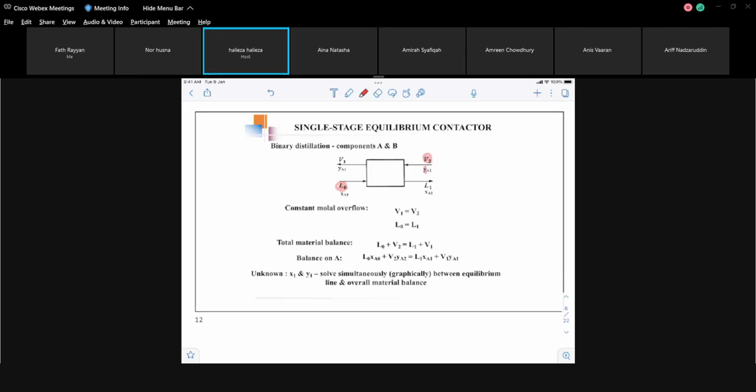So if you look at this diagram, you have vapor coming in at V2, that's the flow rate, and liquid is coming in having a flow rate of L subscript 0. The composition, as always, when it is vapor, you denote the mole fraction by Y, and when you have liquid, the mole fraction is X. Over here, we have the subscript A, because you have component A, the lower boiling point component, and another component B, the higher boiling point component.

So we'll be concentrating mainly on component A, the one with the lower boiling point. So the subscript for your mole fraction will mainly be for component A. This is your first stage, so any flow rate, any stream coming out from that stage will have subscript 1. For example, V1, L1.

So the mole fractions for the vapor and the liquid will follow suit. You will also have 1 as the subscript for your mole fraction.

There's a new term you need to assume: constant molar overflow. Constant molar means the flow rate of the vapor will be the same, it doesn't change, it's constant. Same goes for the liquid, the flow rate of the liquid will be the same. That is the assumption you make.

We'll be looking at a single stage in this case, and you only have two components. You do the material balance as always: input equals output. There's no reaction here, just separation. Your input is coming in here, that's the liquid, and that's the gas. So that's the input, and the output is coming out here, that's the liquid coming out, and that's the gas coming out. So input equals output, and when you do the material balance on component A only, you will be putting in the mole fraction.

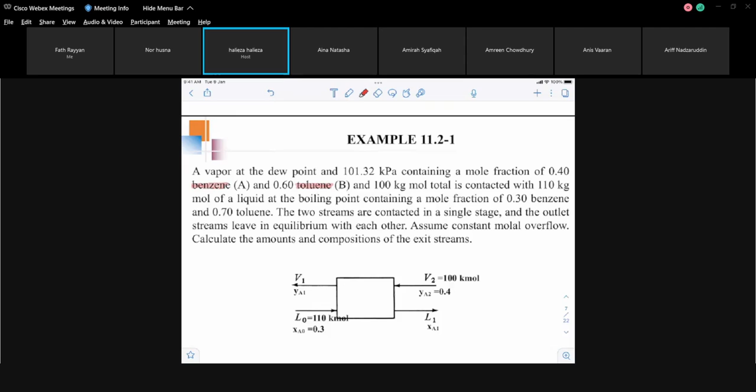So over here we have a mixture of benzene, which is the light component with the lower boiling point, and toluene, which is the component with the higher boiling point. You have a mixture that contains 0.4 mole fraction of benzene coming in. That is the vapor coming in. So your vapor coming in has that mole fraction, that is for benzene.

And the flow rate of that vapor is 100 kilogram mole. I would like to point out that when you're dealing with absorption or distillation, so far the flow rates are in molar flow rate. The unit is in kilomole, mole, or pound mole, so do take note of that. So your vapor coming in has a flow rate of 100 kilomole per hour. This is the pressure of your system.

That vapor will be contacted with 110 kilogram mole of a liquid at its boiling point. So the liquid coming in is 110 kilomole per hour. Another thing I would like to point out is that your vapor is at its dew point and your liquid is at its bubble point or boiling point. So this two streams, for the vapor it is at the dew point, and for the liquid it is at the boiling point. That's what actually happens in the column, in your distillation column.

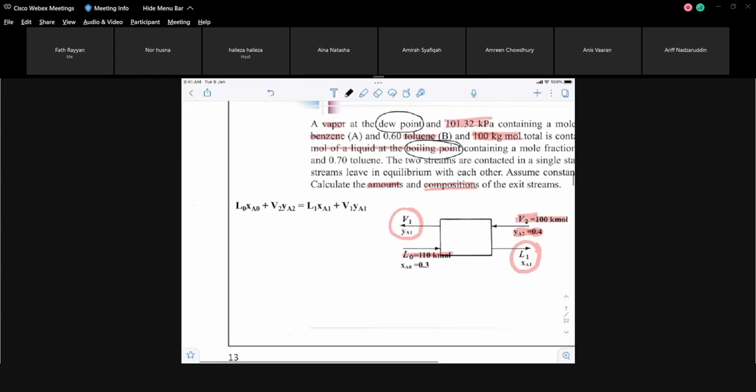We do know the mole fraction of the input stream coming in, we do know that. And also we do know the flow rate of the inlet stream. So let's substitute in the values that we have.

I'm not going to write the subscript A because it is understood that we are referring to component A, which in this case is benzene. So that's your equation, and as you can see, you have 4 unknowns based on that equation.

But there's another statement in the question that states you will assume constant molar overflow. And with that assumption, you will assume that L1 is equal to L subscript 0, and V1 is equal to V2. So that means this flow rate is going to be the same as that flow rate, and that flow rate is going to be the same as that flow rate.

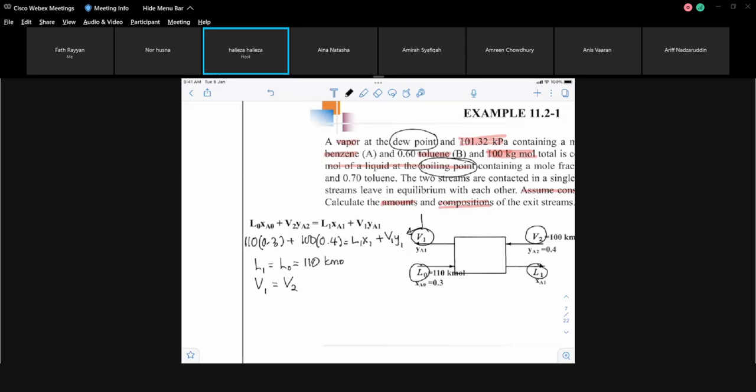So for your liquid flow rate, it is 110 kilomole, not per hour, just kilomole. And your vapor flow rate is 100 kilomole. Now, when you rewrite this material balance, you are left with only two unknowns.

Need the bracket. Two unknowns, one equation, not enough information for you to solve it. So you need extra information. That extra information is in the form of our graph. Let me try to get the graph.

We need the benzene toluene graph. Let me try to copy it. There you go, try to fit everything in here. This is our graph for benzene and toluene.

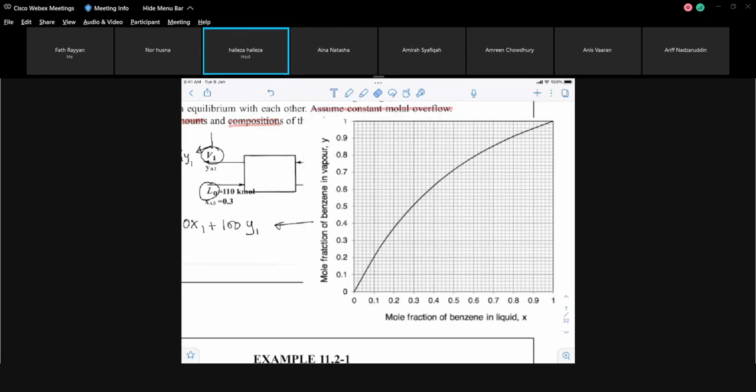I need to erase this. So what we need to do, or you need to do, I'm assuming that for the second test too you need to plot your own graph by hand, unless they decide the graph will be ready plotted. If it's ready plotted, we'll give it a few days, maybe one day before, for you to print it. I hope that can be done, but I can't guarantee it. So just know how to plot your graph.

The graph is plotted whereby the x-axis is the mole fraction of component A in the liquid, and the y-axis is the mole fraction of component A in the vapor. So this is your equilibrium curve, or your equilibrium line, and you can get it from the appendix.

In our case, I already showed you guys how it can be obtained based on Raoult's law, but in fact you don't really need Raoult's law, because in table 11.1 you have your x there and your y there. So you can just plot it based on these values, and you will come up with your graph, which for an ideal solution gives a perfect curve.

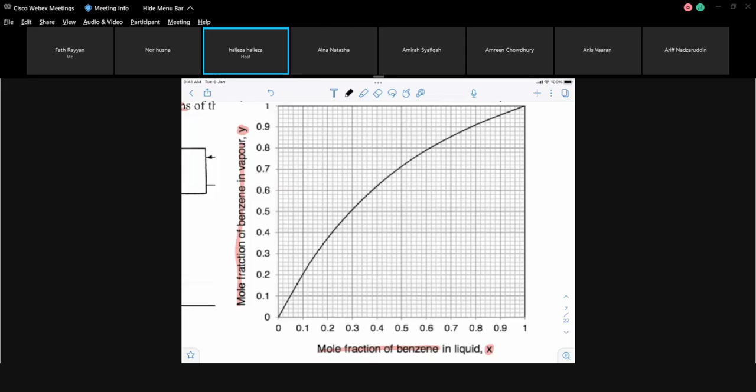In this case, what you have to do next is draw your 45-degree line. I did mention that your 45-degree line is for you to compare how easy it is to separate your components. Trying to get a straight line... there we go. Okay, that is our 45-degree line.

Now let's look at the equation. You have the composition, and you need to calculate the amount. We already did that, we already have L, you already have L1, you already have V1. So now, in order to get your X1 and Y1, it has to be done by trial and error.

You look at your graph over here. Let me get my graph. Okay, by trial and error, try to get points, maybe 3 or 4, or at least 2. I think we need at least 3 points using this equation.

Let's say x1 equals 0.2. Then from there, you try to get your y1. So let's put in the values. I'm going to just multiply the values that I have, that will be easier. That is 33 plus 40 equals 110 times 0.2, because I substitute x1 equals 0.2 inside the equation. So now I have 100 y1. From there I should be able to get my y1. So 110 times 0.2, that's 22.

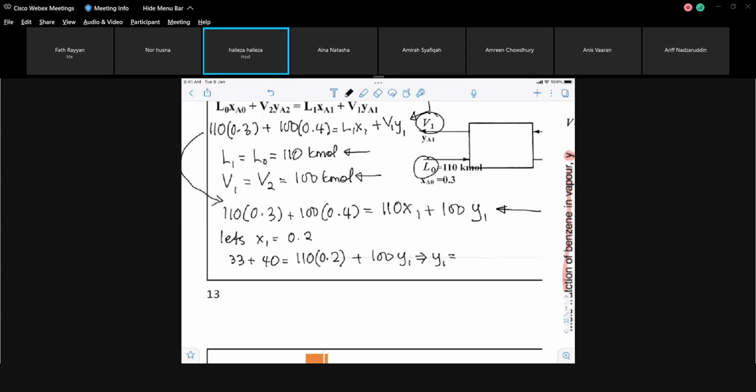So let's calculate what our y1 is. Y1 is equal to 0.51. So I will locate that point on the graph: when my x is 0.2, my y1 is 0.51. So 0.2 is there, 0.51 is here, this is somewhere here. So that's one point, but it's not on the equilibrium curve, so that's not the point we want.

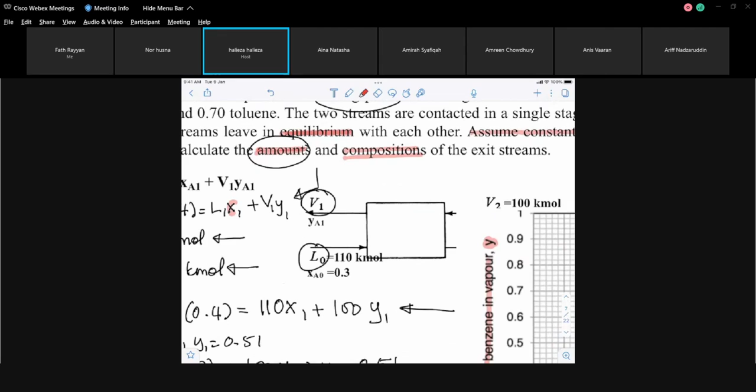The value of x1 and y1 should be in equilibrium, because we said the system comes to equilibrium. So your x1 and y1 should be in equilibrium, the composition should be on the equilibrium curve. But our first point is not on the equilibrium curve, so we need to get a few more points in order to get a straight line. Then where that straight line intersects the equilibrium curve is your value of x1 and y1.

So 33 cancels off, so obviously y1 is 0.4. Just by looking at the equation, you cancel off the 33 on the left hand side and the 33 on the right hand side. So you have 40 on the left hand side and 100 y1. So y1 is equal to 0.4.

Let's put that value here. So our x is 0.3, our y is 0.4. That's 0.3 and 0.4 there. Again, it's not on the equilibrium line. To me, this is good enough - 2 points is good enough for you to proceed to draw your straight line, because a straight line just needs 2 points.

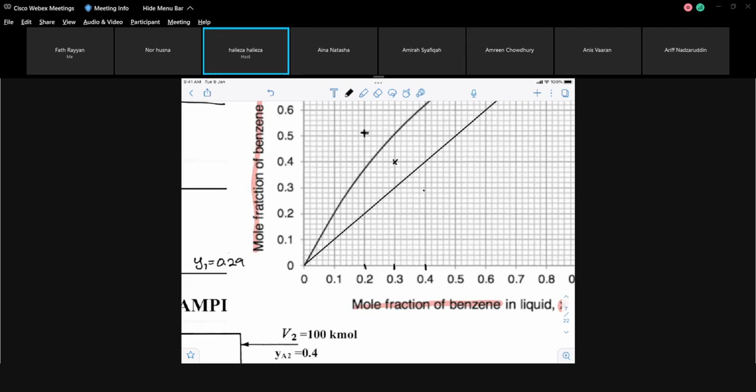So you will join these 2 points, connect them up using a straight line. Let's do it using red color. Let's draw a red color line. Guys, I have my straight line.

That is my value for x1 from the x-axis, and the corresponding value for my y will be from the y-axis. So if we look at the value for x1...

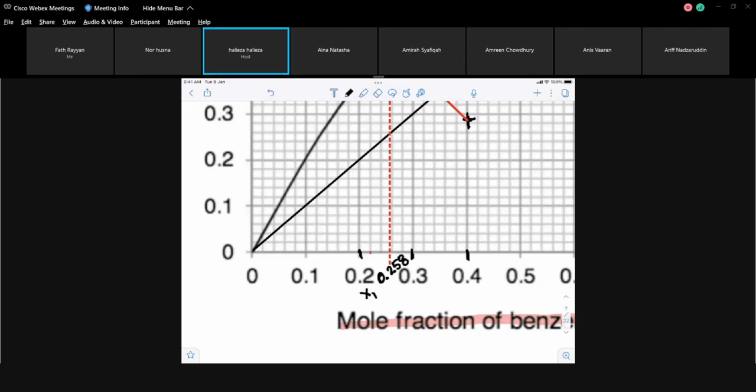That's 2, 4, almost 6, so almost 0.26. About the composition of x1 is about 0.2, so not 6, 2, 4, 6, yeah 6. So about 0.258 maybe, roughly estimate, it's just a rough estimate. And the y value, if you look at it, that's 2, that's 4, that's about 4, 5. That is your y1, and your x1 is 0.258.

But the solution from the textbook, let's have a look at the solution from the textbook. Okay, the textbook y1 is equal to 0.455, and the x1 is 0.25. So it's not exactly the same, because it's how we draw our lines, how we read off the values that contribute to the difference.

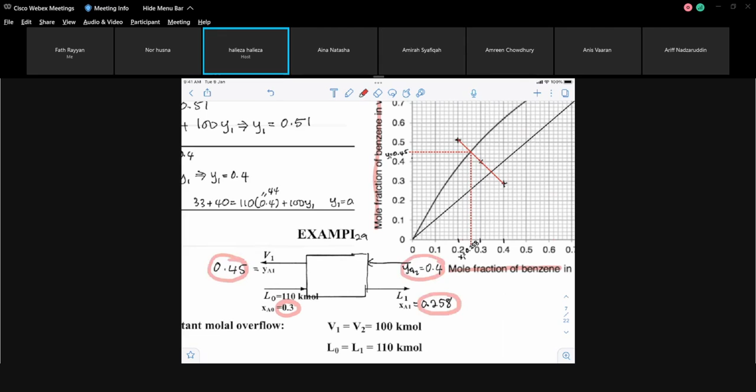Y2, what is that composition? It's 0.4. So now you can compare that there's not much change in the composition there. Same thing for the gas, for the liquid, 0.3 going to 0.258. It's only a slight, very small change. So a single stage is not good enough for the industry - you need, in order to achieve bigger changes, more than one stage. Okay, any questions?

Doctor: For the graph, is it certainly a straight line if you do the trial and error and connect all the points? Yes, because it's based on the material balance, you will get a straight line. Thank you, Doctor. You're welcome.

Any other questions? Normally, when you plot the graph, you will get the maximum mole fraction is always 1. So that you can draw your 45-degree line - just connect the 0 to the upper point, which is 1. So you will know that your 45-degree line is connecting from the origin to the upper corner of your graph. And normally you will plot it until 1.

So no questions? Okay, we have a few more simple distillation. They are mainly single stage. The other one here is equilibrium or flash distillation. Again, the product will be in equilibrium.

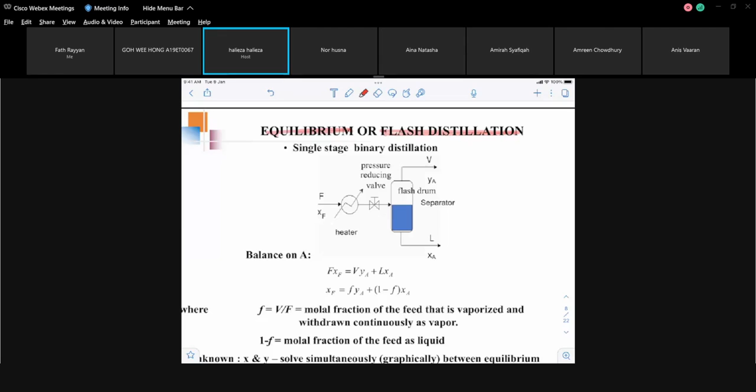And if you look at the diagram here, you have your feed coming in, having that composition, preheated in a heat exchanger. When it is preheated, that means your feed becomes hotter. After that, it passes through a pressure reducing valve, meaning your feed pressure will be reduced. The pressure will be reduced from the initial pressure.

There will be a drop in pressure. So initially it is at high pressure, now there's a drop in pressure. And when the drop in pressure occurs, your feed, which is initially in a liquid phase, will vaporize due to the sudden drop in pressure. But in doing the vaporization, the sudden vaporization will cause a drop in temperature. And when there's a drop in temperature, the higher boiling point component will condense. Because remember, you have two components - we're talking about two components, A and B.

Your component A is the lower boiling point, and B will be the higher boiling point. So when there's a drop in temperature, component B will start to condense.

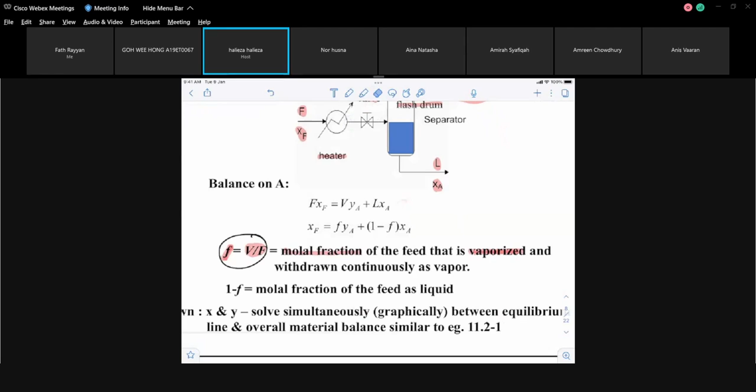Based on the second equation, you should be able to use it to solve for the unknown composition, which is the outlet composition. Again, you need to use your graph - you cannot solve it just based on one equation, because you have two unknowns, the y and the x. So you have to solve it graphically, just like what we did in this example. Same thing as how we did it in this example, but in this case you will be using this equation.

Let's look at, maybe just to give you a rough idea of how it can be done - I'm going to give you an example, just a rough idea. Let's say our feed flow rate is 100 mol per hour, or it might not matter the units - just let that be your basis. Your XF, the composition of your feed, will normally be given. So let's say it's 0.5 mol per mol, with component A and B.

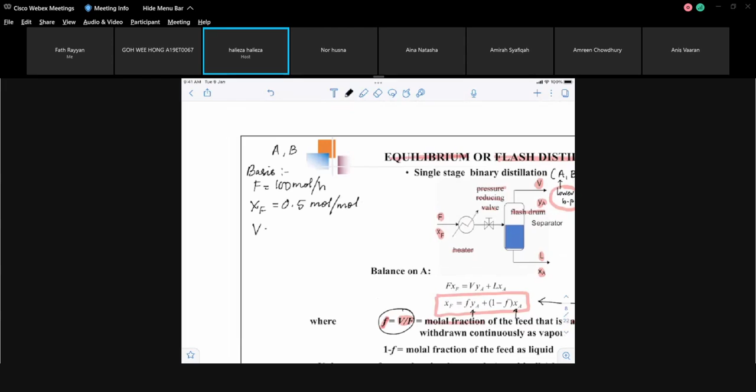So the amount that vaporized will be mentioned in the question - for example, let's say the amount vaporized is given as 60 mol per hour. So your V over your F is going to be your F, that is 60 over 100, which is 0.6. With that information, you can get the flow rate of your L, the liquid, from your mole balance - 100 equals your vapor plus your liquid. So you should be able to get the flow rate of your liquid, in mol, not kilo.

So now, how do you solve for your unknown compositions? You have to plot yourself a graph.

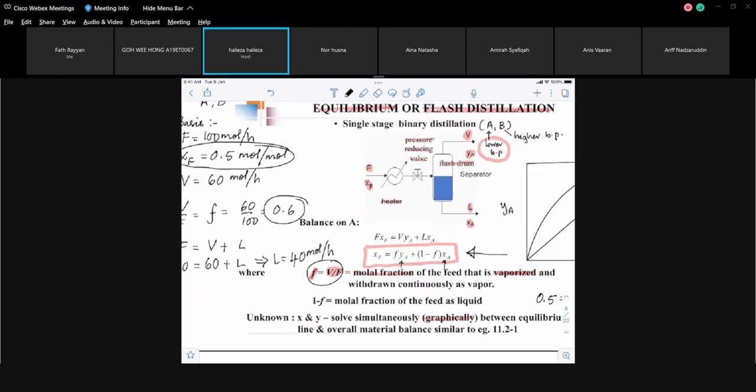So now what I have to do is, based on this equation, I will write that equation over here. 0.5 equals to my molar fraction that vaporized, which is 0.6, times Y plus 1 minus 0.6 X. So that part will be, of course, 0.4. But again, you have one equation, two unknowns, so you have to do it by trial and error.

Let's say X equals to, for example, 0.2. Then solve for your corresponding Y. And then do the same thing for another point, for example 0.3, then get your corresponding Y. So now you have two points. So maybe just say roughly, 0.2 is somewhere here, for example, you get somewhere there. 0.3, you get somewhere there. Well, I think one point would be enough.

You don't really need to have two because you're going to join it and it's going to join that point on the 45-degree line. So I think one point is good enough. To draw a straight line you only need two points, because the other point is obviously on the 45-degree line. So in order to draw a straight line, you need that point.

But then if you want to get another extra line, obviously it's going to be on that same line. So now you will get your outlet composition for your X there - that is your XA - and your Y over here, YA. And so that's how you do your flash distillation.

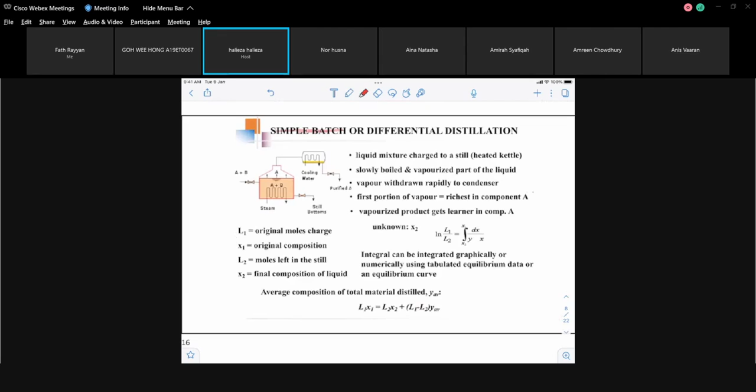If you look at the diagram, here you have your pot or your still. You put it inside there because it's batch - batch means you put your product at the beginning, and then towards the end you stop it and get your product. So what happened here is you put your feed into the still, this is the heated kettle. Initially you put your liquid there, and the initial amount you put there is L1. That's the amount you put inside the kettle, with that composition X1 - that's the initial composition of your feed, which is denoted by L1 instead of F. And this is the amount that you put in.

After you start boiling it, part of the liquid will vaporize and will be collected here after it condenses. Then you have this heat exchanger there. So the first batch that vaporizes, the first vapor that condenses and gets collected in your vessel, will be the richest in component A. Why is it richest in component A? Because component A has the lower boiling point, so the first batch that vaporizes will have the most of component A.

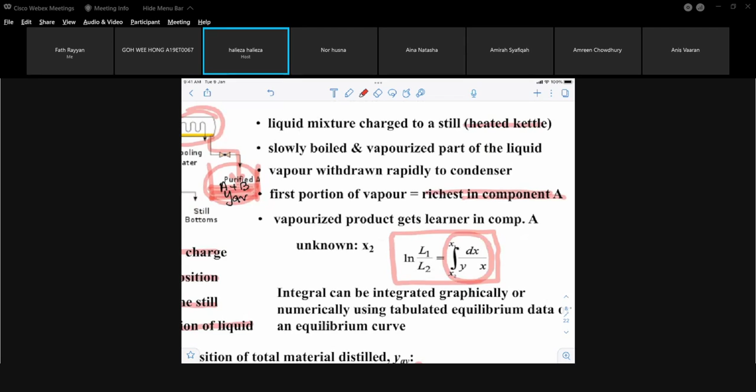If you look at this equation, this part is an integral, and as always, you can do it either graphically or analytically. If you do it graphically, you have to plot x versus 1 over y minus x. There's a minus sign there missing. And the area under the graph...

The first x is going to be your x1. So your x1 is here. Let me scroll up so that we can look at the graph. Sorry, x1 is over here. Why is x1 a higher value?

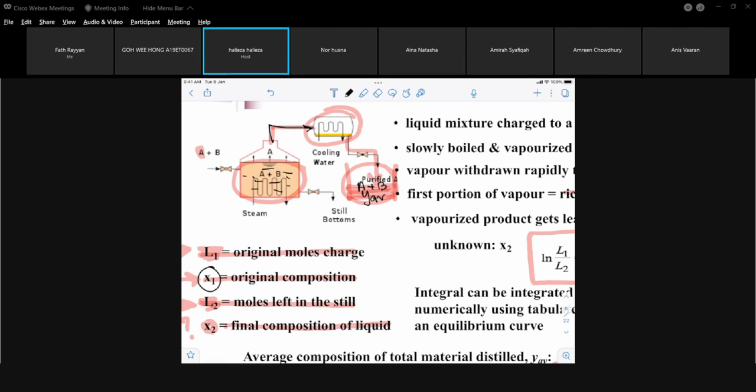Because as more and more is vaporized, we are looking at component A here. As more and more is vaporized, there will be less of component A in your still, in the liquid, because more and more of A will be vaporizing. So towards the end, the mole fraction of A will be less. Initially it's higher, so x1 will be here, x2 will be there.

But the problem is, you don't know what x2 is. You only know x1. So you have that value known, but you don't know this other value. So it's by trial and error - you got to get the area under the curve so that it equals the value calculated based on your natural log. Whatever that value is, that will give you your answer for x2. So the area under the graph should equal the calculated value of this equation on the left side. So it's by trial and error.

So let's look at this example. Over here you have your L1 - it's not coming in, it's the L1 that you initially put into your kettle. The composition of your L1 is 50%, that's x1, 0.5. L1 is equal to 100. Your component A is N-pentane, and the other component is N-heptane.

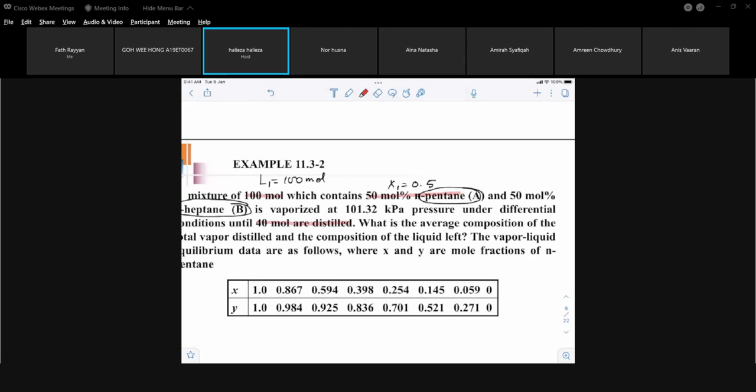You're going to vaporize it until you get 40 mole distilled. 40 moles are distilled. Does that mean it's V or is it L? Guys, is that V or is it L? L - because your L is the one that is left in the column. The V is the one that is at the top, the one that gets collected.

Which one? Anybody? Is that the amount - is 40 mole until 40 is distilled - your V or the L that is left in your kettle? What is it? Distill - got to understand the statement. Distill, so is that your V or your L? V, V - it should be going upward.

It is distilled, isn't it? It should be the one that is getting into the vapor, that is going up as the vapor. That is 40. So if 40 is distilled, that means the amount left in the kettle - if this is 40, the amount left in the kettle will be... initially it's 100. Initially L1 is 100, that's initially in the kettle.

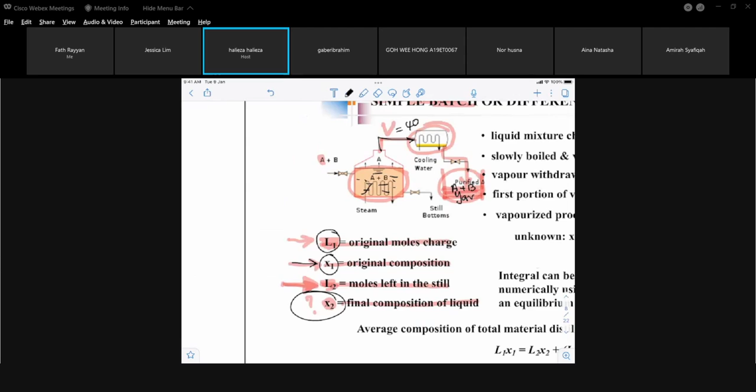So when 40 mol is already distilled - it's not the second - 40 mol already distilled, so what's left in the kettle? Guys? 60 mol, that's L2. 60, that's left. Initially it's 100 mol.

So the question is, what is the average composition of your vapor? And again, distill - you have that statement, distill. So you need to get your understanding correct here: distill means that it is becoming vapor, that it changes into vapor. So the question asks for the average composition of your vapor, and the composition that is left - that is the X2 that is left. You need to find these two values.

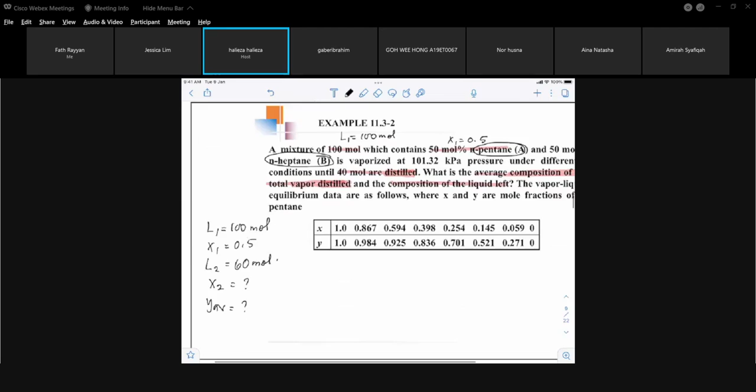So over here you have your X and Y data for your system, pentane and heptane. So you should be able to plot your graph. You're not going to plot Y versus X or X versus Y. Why? Because based on the equation, you're supposed to plot X and 1 over this graph. Let's get the equation.

Going to use that equation to solve this problem because this is a batch distillation.

So putting in the values: L1 is 100, L2 is 60, X1 is 0.5, X2... that's if you do the calculation.

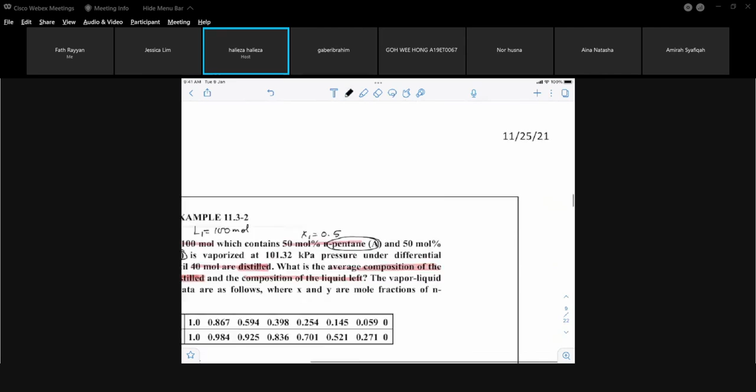0.51. So your area under the graph must be equal to 0.51. So you need to find that X2 value so that the area under the graph is equal to 0.51.

So it's just by trial and error. You need to plot it based on the data here. Or you can do it numerically, like we did for the cooling tower.

You have your X, you have your Y. You need to do Y minus X, then 1 over Y minus X. Get your delta X, because the graph is in this format. Then get your 1 over Y minus X average. Lastly, multiply the two of them.

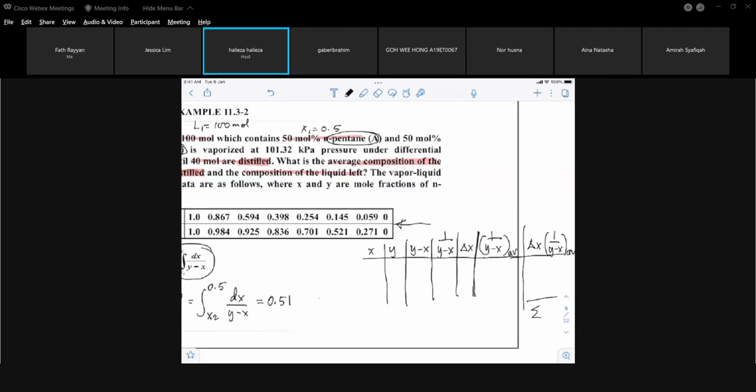The sum should be that value. So when is it 0.51? That's the X that you need. You need to do it until the summation is equal to 0.51, and that will give you your X2.

And that's how it's done. Either you do it graphically, and if you do it graphically then it will be something like this, or if you do it numerically, that's how you're going to need these few data to do the calculation until you get 0.51 as your summation for the last column.

So the next part of the question asks for the average composition of your vapor, and that can be done using this equation. So when we plug in the values, we have 100, 0.5, 60.

The value that you get from your graph just now, or from your numerical method, that value should be known by now. So L1 minus L2, L1 is 100, L2 is 60. So the only unknown left is your vapor composition. You should be able to calculate it now.

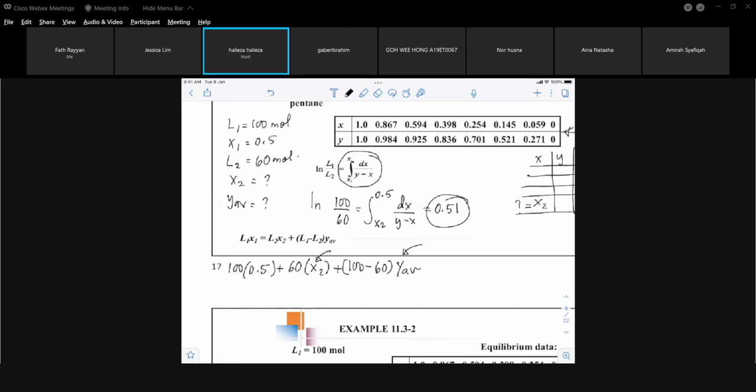So let's look at the solution. Over here, the graph has been plotted, and it so happened that the value of x2 is 0.277 to give you the area under the curve of 0.51. That's when x2 is the correct value.

So with that information, you substitute it inside the equation here. You have your x2 there. So you should be able to get the answer for your vapor composition, which is 0.835. That composition is for component A.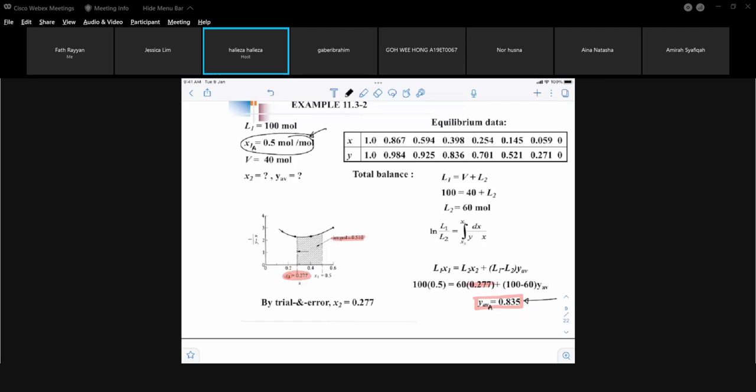Initially in your problem, this is the composition of A in the mixture coming into the kettle. But once you do the distillation, you have a higher amount of component A in your vapor that condenses. That's a big difference from the original composition of 0.5. That is actually what we want in distillation, because we want to change the composition from a low value to a higher value. So the higher value is the one that is being distilled, the one that changes into vapor and then condenses and gets collected.

Okay guys, any questions?

So far, the three cases that we looked at involve trial and error. You have to plot your graph, draw your straight line, and get certain points. For this example, you need to plot your graph and get the area under the curve, and find the value of x2 when the area under the curve equals the solution of the integral, or the solution on the left hand side of the equation. So for this example, this is the equation.

Any questions? You have a lot of problems at the back of the chapter that you can try to test your understanding of how to solve the problem. Any questions?

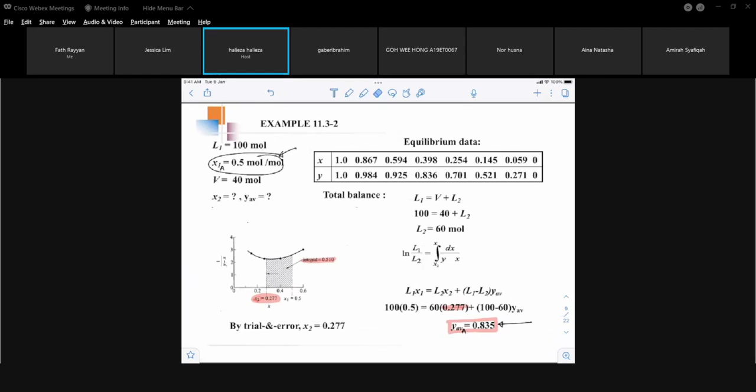No question, I assume, because nobody is asking. Okay.

Almost 12. Okay, we got another roughly 50 minutes, 55 minutes.

Simple steam distillation. I'm not going to go through this in detail, I'm just going to briefly explain it.

Steam distillation is mainly used when you have a very high boiling point substance that needs to be boiled, needs to be distilled, but you cannot distill it at a very high temperature, because if you distill it at a very high temperature, you will decompose it. You can't afford to distill it at a very high temperature, because that component itself will decompose at a high temperature. So you need to do the distillation at a much lower temperature.

Most of the time, steam distillation deals with products of plants, for example getting essential oil.

You cannot distill it at very high temperature, because if it's too high you will decompose the substance. So what you do is put in steam together with your liquid that you want to distill.

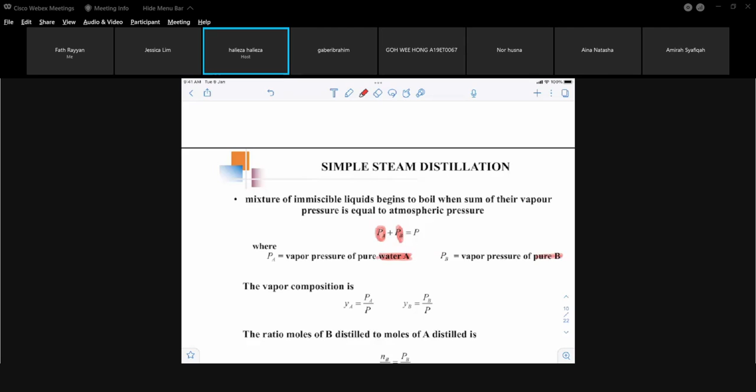When you divide the moles of component B that distilled by the moles of component A that also distilled—remember, distilled means it is the one that vaporized—that ratio equals the vapor pressure of B divided by the vapor pressure of A. Those are the two equations you need to know.

Besides this equation, which is Raoult's—I think it's Raoult's or Dalton's, I'm not sure, you can check on that—these two equations are what you'll be looking at when dealing with steam distillation.

We will not do any example on this. There is a problem at the back of the chapter.

So we will look at fractional or rectification distillation. This is the main topic that will be asked in your test 2, besides multi-component distillation.

This is what they use in industry—you have multiple stages, as you can see from the schematic diagram. Here your feed is coming in as liquid. If your feed is in the form of vapor, it should be coming in at the bottom. Since your feed is coming in somewhere along the column, most of the time it is liquid.

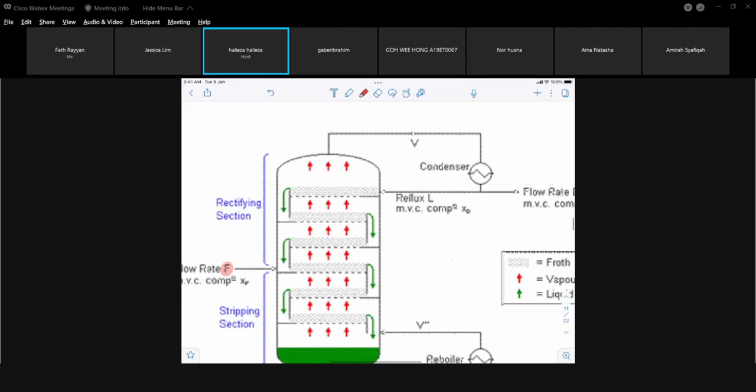In your column you have stages, which are the trays. You also have a partial reboiler. Why is it called partial reboiler? Because part of the liquid that enters the reboiler will vaporize, whereas the remaining part will still stay as liquid.

You also have a condenser. The way this diagram is drawn, this is a total condenser. There's also another type, the partial condenser. With a total condenser, all of the vapor that enters it will be condensed, so this stream is in the form of liquid.

That stream is also in a system called reflux. Reflux means part of the vapor that is condensed will be returned back into the column. So you have this V and this L there.

The reflux ratio is always L over D, not V. There's actually two reflux ratios—one is L over V, and one is L over D. But most textbooks look at L over D. That's the reflux ratio.

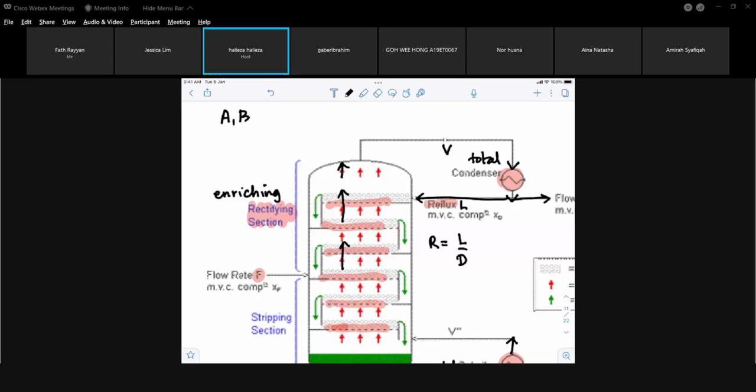I need to mention that the section of the column above the feed is the rectifying section, or as your textbook calls it, the enriching section. Why is it called enriching? Because the vapor, as it flows upward, gets enriched in component A—since you have only two components, A and B, the vapor gets richer and richer in component A as it goes up.

The section below the feed is the stripping section, where the liquid coming down gets stripped, or removed, of component A.

The liquid coming down will be stripped of component A, because as it goes down, the temperature gets higher towards the bottom of the column. As the liquid goes down, the bottom of the column is at a higher temperature.

Component A is the lower boiling point component. So as the liquid goes down, component A will vaporize, and it is stripped of component A. So component A will start vaporizing upwards, and the liquid is being vaporized. The liquid now is stripped of component A.

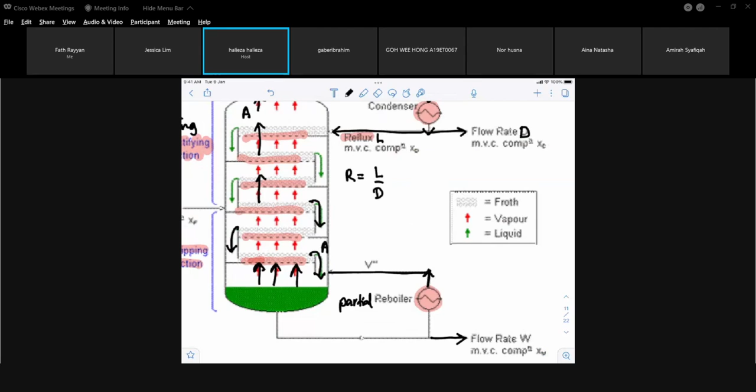So when it enters the reboiler, part of the component will vaporize, and that's where this component is going upwards. The vapor is going upwards, and your liquid is going downwards. So the liquid is on the tray, and your vapor will pass through that liquid. That's where the mass transfer is occurring.

Your liquid will come into equilibrium with your vapor, as is the case for a single stage. Earlier, when we were looking at a single stage, that is actually what is happening on a tray. This is a single tray, or a single stage. The vapor coming in is the vapor from the reboiler or from the bottom of the column.

And the liquid coming in is the liquid returned as reflux at the top of the column. So you have this vapor going upwards and the liquid going downwards in the column. So this is one tray, and the vapor and the liquid will be in direct contact on the tray. That's where the mass transfer is going to happen. And then you will get your liquid coming out of that tray in equilibrium with the vapor coming out of that tray. So this is equivalent to one tray, or one stage.

But now you'll be looking at multi-stages, you have lots of trays, not only one.

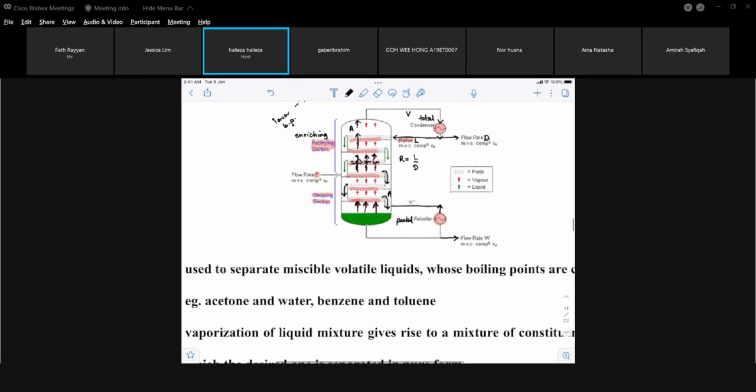And the function of the reflux is that you will get more and more pure product of your distillate. This is referred to as the distillate. Not pure, almost pure, not pure. It's almost impossible to get 100% pure. And this is your bottom product.

Denoted by the symbol W. Some textbooks use B because it's bottom, but our textbook uses the symbol W, and over here distillate is capital D. Your feed, obviously, is F.

Your bottom product will mostly contain component B. Your distillate will mostly contain component A, because remember, A is the lower boiling point and B is the higher boiling point. So these are the two products that you will get from a fractionation column.

Unless you have a multi-side stream, multi-product case, which you will look at later on as a special case. In this case, you want to get two products, the distillate and the bottom product.

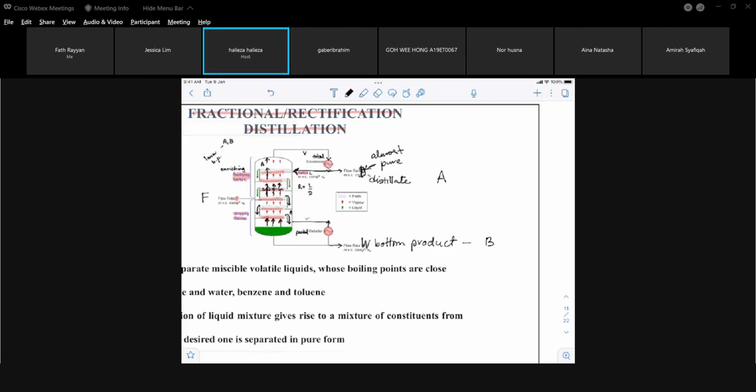So how do you do the problem? You will do it graphically using the McCabe-Thiele method. I already explained this part. You will use the McCabe-Thiele method, and you will draw your graph. So again, you have to solve the problem graphically, and you have to draw your graph.

And in the graph, your x-axis will be the mole fraction in liquid, denoted by x, and your mole fraction in vapor, denoted by y. This is your feed composition, this is your bottom composition, and this is your distillate, or top product composition.

You need to draw your Q line. You need to draw your enriching operating line, and you need to draw your stripping operating line. You have three lines.

And after that, you do your staging in order to get your number of theoretical stages, just like the way we did in absorption, using the steps method. Normally, you start from XD. Your first stage will be the first step here. That is your first step, your first tray.

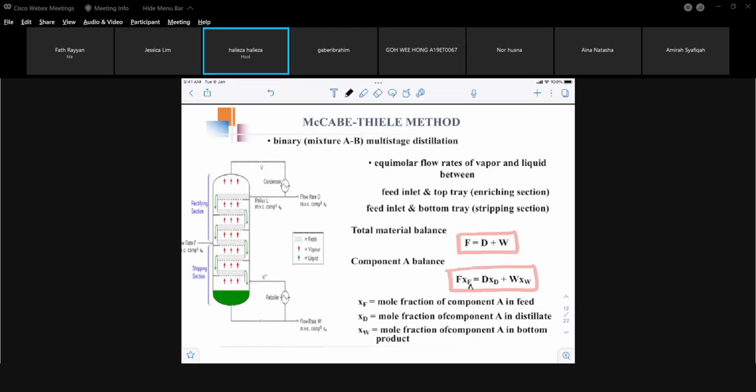We will assume, again, just like what we did in the single stage, equal molar flow. That means in this section, the liquid coming down L is going to be the same as the L, and the vapor going up from this part and that vapor stream will have the same molar flow rate.

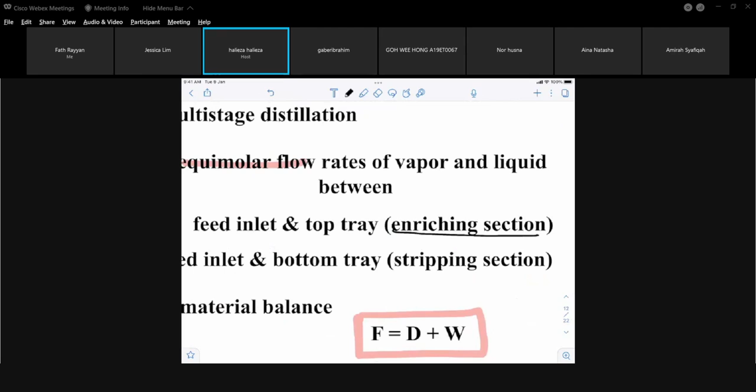But if you go down towards the stripping section, this liquid coming down, let's give it a symbol, component N. That will be Ln minus 1, and that will be Ln. Ln minus 1 will not be the same as Ln because it's not the same. You have two separate sections here. For the enriching section, you have the same molar flow rate. For the stripping section, you have the same molar flow rate, but they are not the same between the two of them.

So let's give this symbol again. This is N minus 1. Oh, this is not a good symbol, let me undo that. Let me put numbers instead, it's easier if I use numbers instead of alphabet. 1, 2, 3, 4, 5, 6.

So that stream is L3, because it's coming down from stage 3. This vapor, V4, V3, V2, V1. So V1 equals V2, equimolar flow rate, constant. L1, L2. Here, L4, L5, L6. This is V7, V6, V5. V7 equals V6 equals V5.

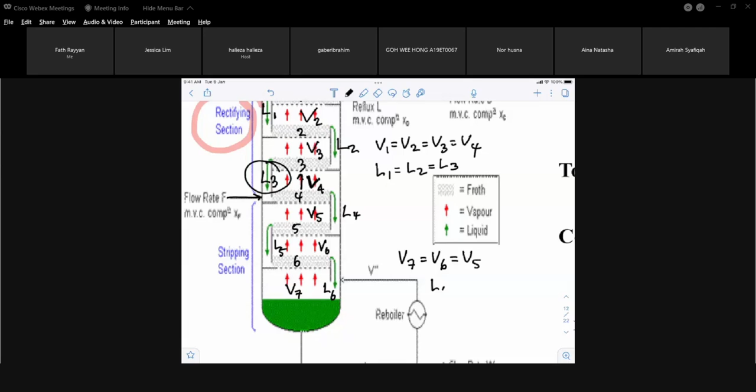Your L4 equals L5 equals L6. Your L here will not be the same as the L over here, they're not going to be the same. Neither is the V over here going to be the same as the V in the enriching section, they're not going to be the same. But for this section only, they are the same: the V will be the same, the L will be the same. For the enriching section, the V will have the same flow rate, the L will have the same flow rate. It's just that if you are in the enriching section, you're not going to have the same flow rate as that in the stripping section. So that's what the implication is.

Okay, now to do the graphical method, you need to plot your Y versus X plot. Your equilibrium data is normally given. For example, you have benzene and toluene, so this will be the plot for A, YA and XA for benzene only. Looking at the benzene toluene data from earlier, table 11.1-1.

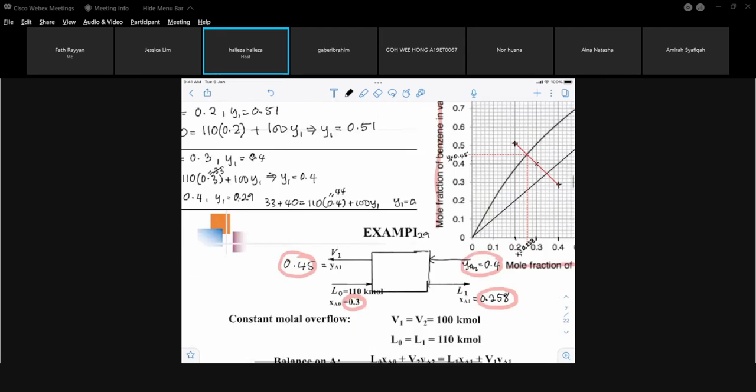Okay, this is your benzene, for your X and your Y, for a pressure of 1 atm. So plot your X versus your Y, and it will look something like this. Graph that, something like this. That is your X and your Y. Obviously you will not get exactly that line, but this is for an example.

You will get your points, and that is where your equilibrium curve is going to be. From the points, you will get your equilibrium curve. You need to draw your 45-degree line, and that's the first step. The first step is to plot your graph, plot the equilibrium curve, and get the 45-degree line. The 45-degree line will be joining from the origin to the upper point here. So that is a 45-degree line, that's the first step.

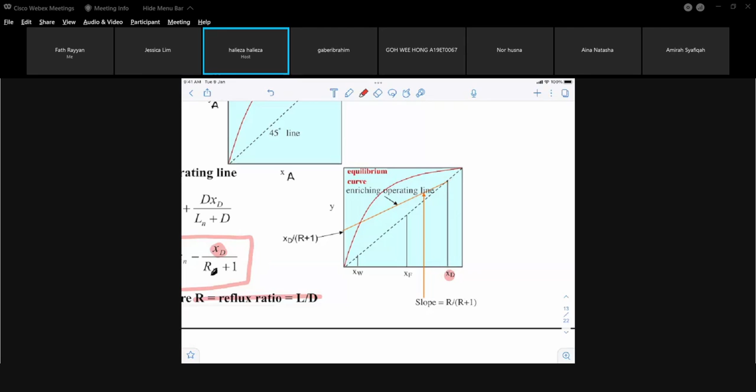Draw a vertical line until it reaches the 45-degree line. If you don't want to draw the vertical line, you should know that point is the point having the coordinate XD. So that's your starting point for your operating line, your starting point will be here, that is your starting point for your operating line.

To get a straight line, you need another point. What you can do is get the y-intercept, based on the equation here, that's your y-intercept. Does it include the minus sign? We will see in the example. So you get 2 points: one point on the y-axis, and the other point on the 45-degree line, having the coordinate xd. So you join the 2 points, and you will get your enriching line. Let's look at an example of how to draw it.

This is the example. Scroll through the statement. You have a liquid mixture of benzene and toluene.

You're going to distill it at 1 atm. Your feed is 100 kilomole per hour, and it contains 45 mole percent. Take note of the unit, not jot down. Take note of the unit - it is mole percent, not mass percent.

If the unit is given in mass percent, convert it to mole percent. Sometimes the lecturer likes to play tricks by giving mass percent - you have to change it to mole percent. The same goes for the flow rate, which must be molar flow rate.

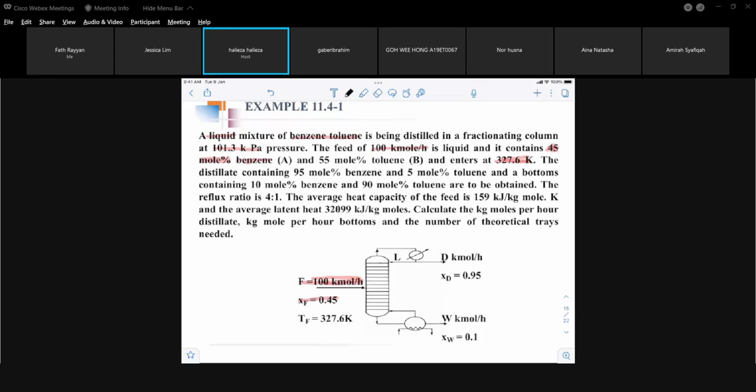That is the temperature of your feed coming in, so I have put it over there. That is your benzene - if you want to write subscript A, you can do so. If you don't want, it's understood that it is referring to benzene. The temperature of your feed is given.

You're going to distill it until you get a distillate that contains 95 mole percent benzene. So your distillate will have that composition, 0.95.

And your bottom product will only contain 10 mole percent of benzene. So that's the composition of your bottom product, denoted by XW. The flow rate is W for your bottom product, and distillate has a flow rate of D, capital D.

The question asks, beside that, there's other information. Your reflux ratio is 4, so R equals L over D. That's the flow rate coming in is L - L over D, and that equals 4.

Your average heat capacity of the feed, CP of the feed, is given as 159 kilojoules per kilogram mole of Kelvin - per kilogram mole Kelvin. That is your unit for your heat capacity - it's not kilogram per kilogram, it's per kilogram mole. And the average latent heat of your feed is given as 32,099 kilojoules per kilogram mole.

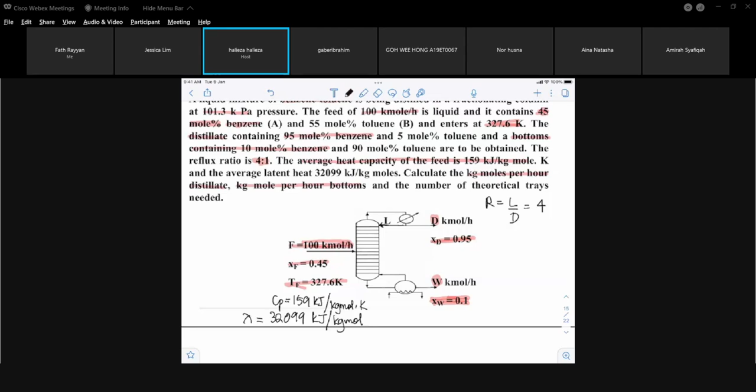Okay, so that's the information given. The question asks to calculate the kilogram per hour of distillate and kilogram per hour of your bottom product. You can do that easily - all you have to do is a material balance on your column. So your total input equals output - that's your balance.

Please write your basis - before this also you need to write your basis actually, for the absorption. That's 100 kilomole per hour, that's your basis. Input coming in is F. Output going out is only the distillate plus the bottom product. So you know that your feed is 100.

Your distillate you don't know, your bottom product you don't know. One equation, two unknowns - it's not possible to calculate the unknowns. So you need another equation. Let's do a balance on component A.

This is the total balance - not this, this total balance. Component balance on component A, which is benzene, gives F·XF equals D·XD plus W·XW. Going to copy, write it over there.

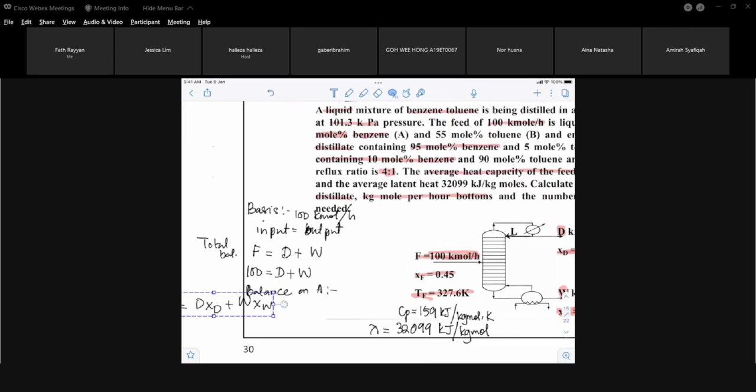Oh, there's not enough space there. What I'm going to do, okay - F is 100, the XF is 0.45.

Your D is the unknown. Your distillate composition you do know, it's 0.95. Your bottom product flow rate you don't know, but you do know the composition of that bottom product. Now you have - this is your first equation, this is your second equation.

From the first equation, you can come up with D equals 100 minus W. So from the first equation, your distillate flow rate equals 100 minus your bottom product. So you're going to substitute that information in your second equation.

Oh dear, I got this equal sign. Okay, so now the only unknown left is the flow rate of your bottom product, which is W. You should be able to calculate that value. Let me look at the solution.

From the textbook, the solution is 58.8 kilomole per hour. Once you substitute that inside the first equation, that equals 58.8, you will get your D - D is equal to 41.2, which will add up to be 100 kilomole per hour.

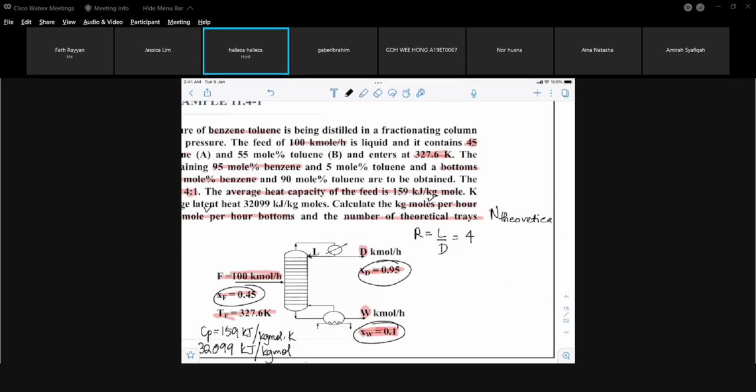Number of stages, theoretical stages or tray. And how to go about that? Let's bring our graph - okay, I'm going to use my graph, I'm going to copy my graph.

Here, that's my 45-degree line.

Okay, this is the best I can do if I'm going to do it on the same page. I get my 45-degree line, same that I did earlier. Make sure it's really, really on the origin.

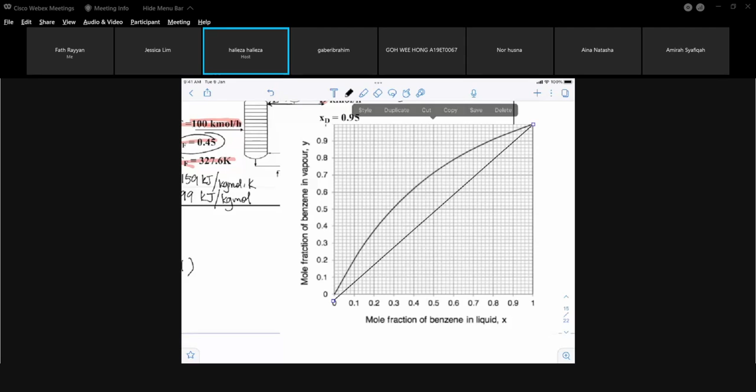Okay, my coordinates: my XD, my XF, my XW unfortunately is covered by the graph, but we know that XW is equal to 0.1. That is going to be my XW, that is my XD, that is my XF. I'm going to plot that, locate that location on my graph. XW is 0.1.

That's XW. My XD 0.9. Sorry, my XF, my feed mole fraction is 0.45. So 0.45, that's 0.5, that's my XF. And my XD 0.95. I need to locate these three points on the graph.

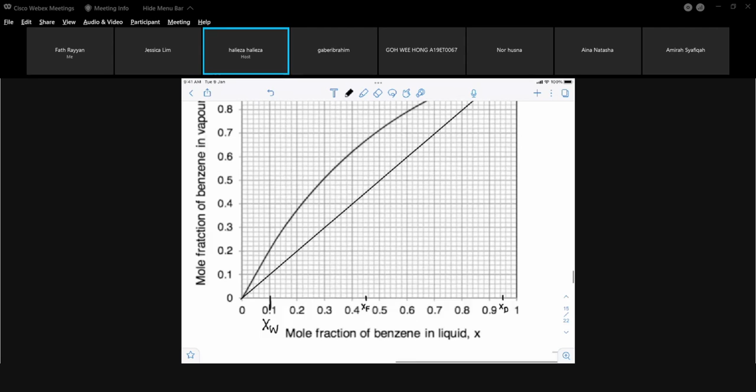Now, what I need to do now is get my point XD on the 45-degree line. So on the 45-degree line, well, that's somewhere there. That is my starting point for my operating line, the enriching operating line.

So just now the equation, I need to copy the equation. That's the equation just now. Given the fact that R is 4, based on the equation, R is given as 4.

So substituting it inside your equation, as R, you don't worry about the subscript D there, but this one still must be maintained, don't cancel it. That is the R, the reflux ratio with the D, is the one that you need to cancel, the D. Okay, your R is equals to 4, so I'm going to put 4 there. 4 plus 1, X, don't worry about this subscript.

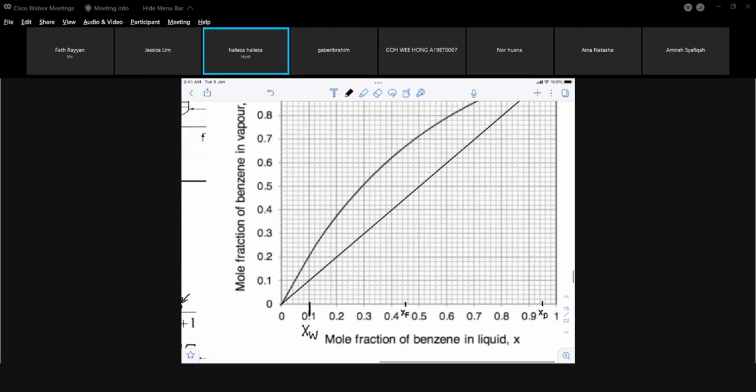That is your y-intercept, that is your slope. What you got to do, either you start from this point, get your slope and draw a straight line, or the easier way for me is to use the y-intercept. The y-intercept is 0.19, it's there. Okay, so now I have 2 points that I can connect and get myself a straight line. So that will be my operating line, my enriching operating line.

So let's do the line. Okay, so that is my operating line for my enriching section. That's done. Any questions so far?

If you calculate the slope, it should be the same as 0.8. It's easier just to connect from the y-intercept to the XD coordinate on the 45-degree line. Any questions? Are you guys with me?

Yes, doctor. Doctor, for the y-intercept, the negative, do we just ignore it? Yeah, you don't worry about the negative sign, because the negative sign will give you points lower than 0, I mean below the origin. That's not what we want. We only want everything positive. Okay, any other questions?

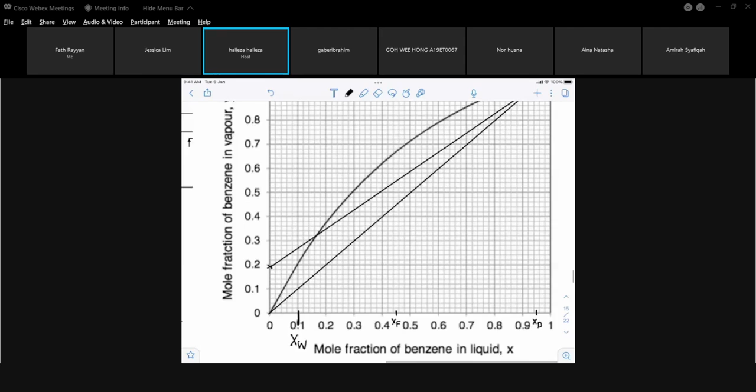No questions? Okay, next, what you need to get is your Q line, the feed line. Okay, the Q line is the feed line, or the Q operating line. And how to go about that?

We'll look at the equation. Now let's see, that's the equation for the Q line. We have done the operating line, step number 2, for the enriching section. We've done that. Now we're going to get the Q line. What is Q? Q is defined as the fraction of the feed that is liquid, that is in a liquid phase.

Okay, Q is defined as the fraction of the feed that is in a liquid phase, and it is also defined according to this statement, and also according to this equation. So if you use the equation, you will come up with this operating line for your Q. That is your Q operating line.

And over here, you change it into an equation, that is how it's going to be. Okay, from the statement, Q equals to heat to vaporize 1 mole of your liquid feed, divided by the molar latent heat of vaporization of the feed, you will get that equation. Okay, over here, let's go through it. That is your heat capacity of your liquid feed.

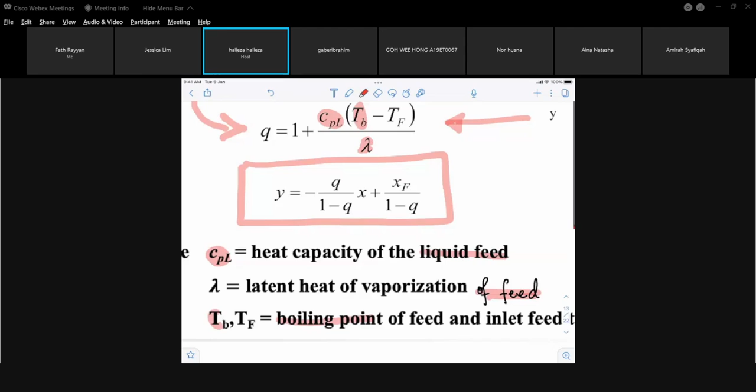That is your heat capacity. That is the latent heat of your feed. I did not write that down, so please write it down in your notes. Okay, latent heat of your feed. This is the boiling point of your feed. That's the boiling point of your feed. Okay, and that's the temperature of your feed, the inlet temperature of your feed.

Okay, so you can use this equation after you have managed to calculate your Q. Again, this is your y-intercept, that is your slope. There's a minus sign there. To calculate, to draw your Q line, you have your operating line. This is your operating line for the Q line. To calculate Q, you base it on this equation. That's how you calculate Q. That is the composition of your feed.

Now, let's tidy up because I need to calculate my Q first and then draw my operating line. Copy these two equations. Bring it over to the example.

That's my equation for Q. Okay, so looking at this equation, I'm going to erase it because I already got it done. I need space.

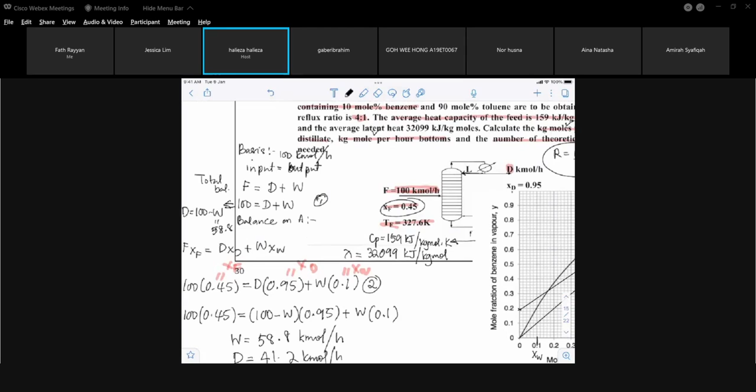Okay, Q. Let's put in the value. 1 plus the heat capacity of your feed is already given, that's the heat capacity of your feed. Make sure the unit is the same so that it can cancel off, yes, kilojoules, kilogram, mole, Kelvin. So I think it's not a problem to cancel off the unit.

159. The boiling point of your feed you don't know, but the temperature of your feed is there. It's in Kelvin, so the boiling point should also be in Kelvin. Your latent heat of your feed is given.

Now we need to find the boiling point of your feed. Your feed composition is 0.45 benzene. So what you have to do is go to the temperature concentration graph.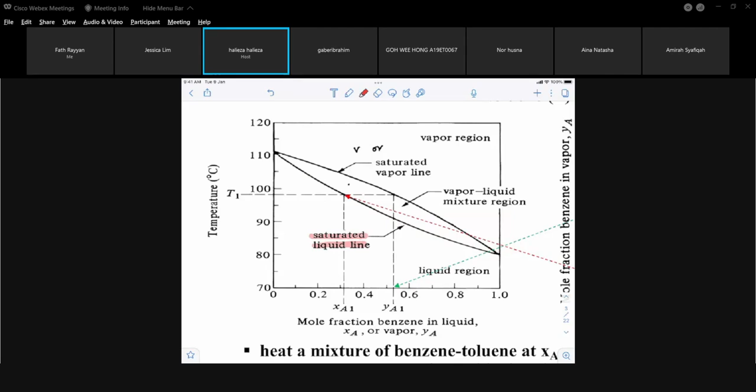The boiling temperature is on the saturated liquid line because this curve is for the bubble point. That is the boiling temperature. Okay, so your feed initially is at 0.45.

The composition is 0.45. So get that on the graph, 0.45. So let's draw a straight line from that point.

If we intersect that straight line, that really straight vertical... it's not vertical, okay, there you go. Now that's your straight line at the composition of 0.45 roughly.

Trying to get it exactly on that. Okay, there you go. And when it intersects with the saturated liquid line, which is the boiling point line, the bubble line, now you have to draw a horizontal line to get the temperature of your feed.

Is that really straight? Is that really vertical? Sorry, it's straight, but it's not. Is it vertical? Yeah, it is vertical. No, sorry, horizontal, not vertical, horizontal.

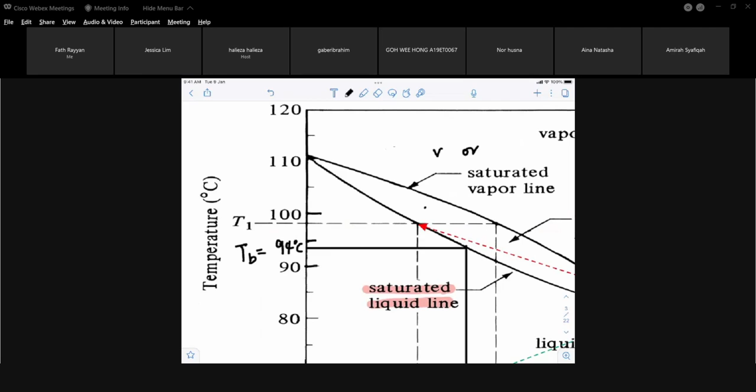So if it's 94, now that's the boiling point of your feed, 94 now. Change that into Kelvin, you need to put it into Kelvin because the temperature that we substitute inside the equation is in Kelvin.

I really need to jot down the page number. I'm scrolling down, it's not a good thing. What page is it? Yeah, this is the page number. What page is it? It's 15.

Okay, that is 95 plus 273 Kelvin. Did I say 95? It should be 94, isn't it? Initially we got it 94.

Yeah, so from there you should be able to get your Q and then substitute it inside this equation. So let's do the calculation. Okay, almost time, but let's try to get this done. We will continue after the break.

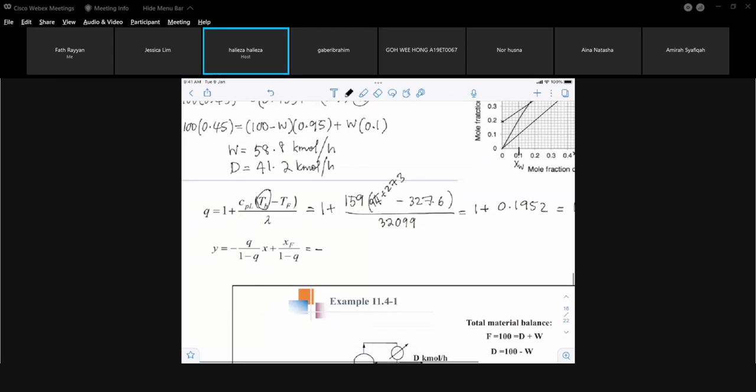Oh dear, what am I trying to do. There should not be a 0 there.

XF is the mole fraction of your feed. Your XF value is that value, 0.45, divided by 1 minus 1.1952. So this is your y-intercept, that is your slope. So let's look at your y-intercept.

Obviously your y-intercept is going to be negative because the denominator is going to be negative. You would just rip it off. That's going to be negative.

Your slope is going to be negative 6.123. That's the slope. So your slope will be positive.

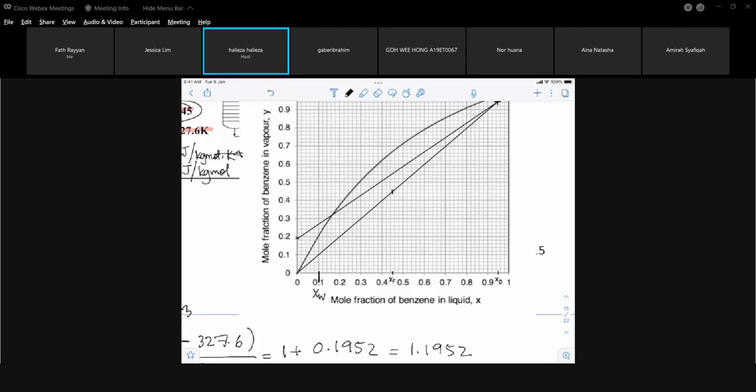One, two, three, four. That is your xF roughly, on the 45-degree line. So you can use the y-intercept. If you use the y-intercept, it will be negative.

So you will project downward here if you want to get a negative value. You can measure 2.3 roughly. Let me try to do that. The distance is 2, that's 2.3 somewhere there, 0.3 somewhere there. Okay, that's the y-intercept.

2.3, but it's not positive, it should be negative. So that's the distance, 2.3. The 2.3 is this distance. That's the distance, and you will project it downward.

Same distance. I'm using my iPad, so it's easier for me to know the distance. It's not that difficult because I can just bring down my line to that point. So it's not that difficult for me.

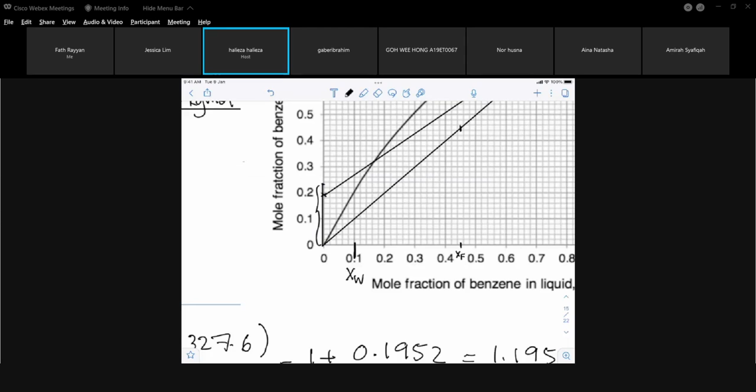So if you're using an iPad, it's not that difficult. You have your iPad, but if you're going to use graph paper, then you kind of use your ruler. So this is my line, negative.

Problem is I need to get it straight. Okay, so now this is going to be my point, my y-intercept, negative 2.3. So I have two points now.

One of it is on the 45-degree line. The point is here at the bottom. So I'm going to connect the two. I'm going to get myself a straight line first, and I'm going to project it until it crosses the enriching line.

There it crosses the enriching operating line. Where it intersects is this point. Where it intersects is that point. So that's one way of drawing your Q line. This is your Q line.

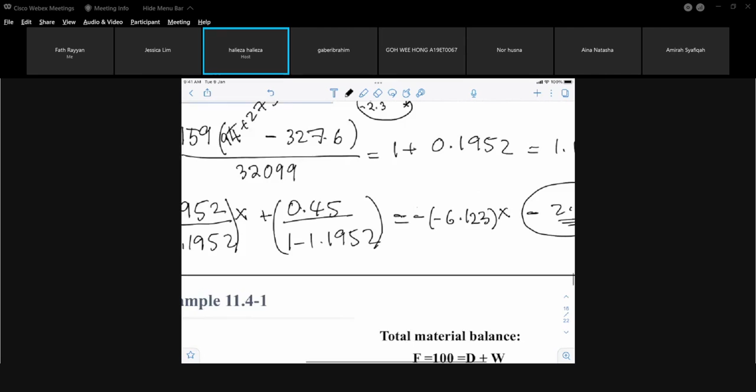That's one way, by using the y-intercept. This is your y-intercept. But the other way is using your slope. This is your slope. If you use your slope, you start from this point, and try to get another point. You should know how to do that.

But let's put one value for x. Let me explain it here. Slope equals delta y over delta x. You do have one point. Your point is here: y minus y, x minus x. So your first point that you have is on the 45-degree line.

So that is your xF. Your xF is on the 45-degree line. That is 0.45. So it should be the same for the x and the y. So in order to get your other point, you need to get that coordinate.

That is equal to 6.123. So let's just try to calculate it. Let's say a value of x equals what? 0.6. Let's let x equal 0.6.

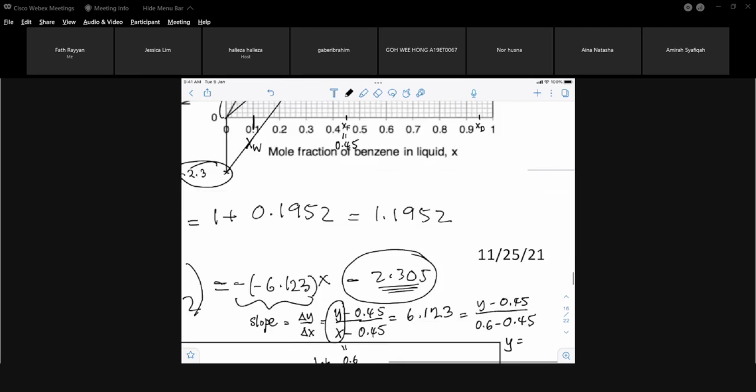So what is your y? Your y is going to be... that's a very big number, isn't it? Too big. Better not use 0.6 because 0.6 is too big. Why? Did I get it right? Come on guys, check my calculation: 0.6 minus 0.45 times 6.123.

Okay. I got something very weird. Anybody getting an answer for y? I got 1.37. That's it, 1.37. Alright, it should not be, isn't it?

0.6 here should give you a value of about 0.6 something. If you look at the line, the Q line, 0.6 is here, isn't it? Should be somewhere there. It's kind of weird. I'm not sure what mistake I made.

But I only know that the point that you start is here, that is 0.45. But if you want to get the slope, your slope will be something like this. Isn't it? That is your slope. Delta y over delta x. Slope equals delta y over delta x. You think that's right?

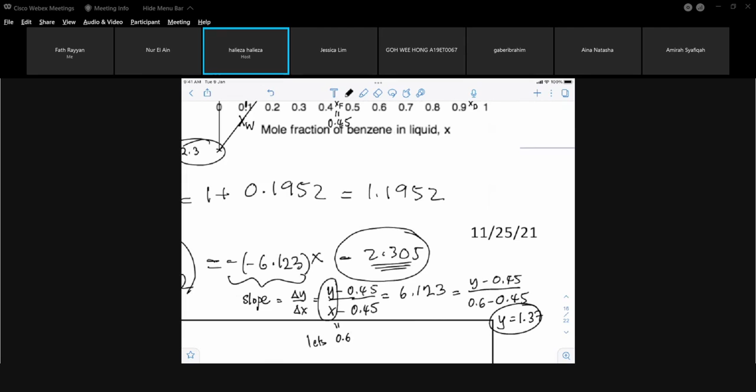I'm not sure what mistake I made here, but somehow the value is not right. You can check what mistake I made there. Okay, so to get the slope, you just need to get delta y over delta x. Let's see, what was my mistake? Not sure. Anyway, we get back to that.

But the way to do the slope is using that equation. That is your slope. Did I make a mistake in the calculation? Check the calculation, did I make any mistake? Let me check the solution from the textbook.

Yeah, the slope is 6.12. That's correct, slope is correct. In the textbook it's 6.12. That's correct, the slope is correct. I'm not sure what mistake I made here.

Why is it such a big value? Because we know I already plotted the graph. I know that if I have x equals 0.8, I will have something somewhere here, isn't it? That point. So why am I getting too big a value here?

Doctor, yes, can I add something? Yes, please. Our y-intercept is 2.3, not 0.23. So can it be plotted down there?

It's negative 2.3, isn't it? Negative, that's... oh sorry, negative, isn't it? Negative, yeah, 2.3, negative 0.23. Hold on. What's the value of your y-intercept?

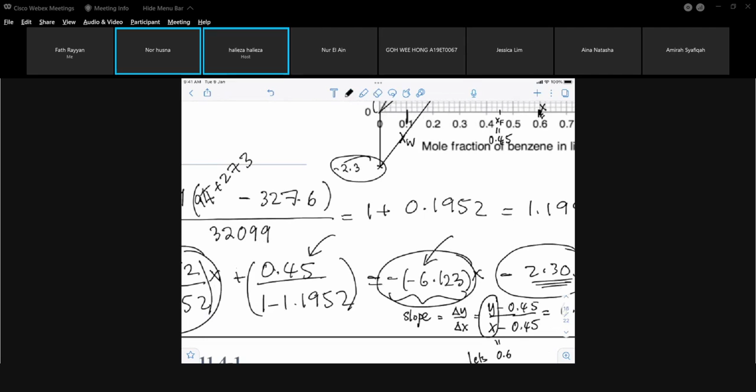2.3. Yes. But our y-axis is 0.1, 0.2... oh god, okay, just relax. That will be really down there, right?

Yes, that's too low down there. This is 0.23. Sorry guys, that's wrong, so that line is wrong. This I did as 0.23, but it's 2.3, it's way below.

It's way below, okay, thank you for pointing that out. So that line is wrong now. I should go very down to get that Q line, so my Q line is the wrong Q line. Yeah, I've got to erase this. So now we're going to do it using slope instead.

Using the y-intercept is not a good idea because it's too far below the origin. It's 2.3, thank you very much for pointing it out. This value is too far, it's 2.3, not 0.23. I thought it was 0.23, that's why I did this.

I did this calculation there, sorry, I made a mistake. Thank you for pointing that out. So it's not 0.23, it's 2.3 - double the length of the graph. So it's not wise to do that.

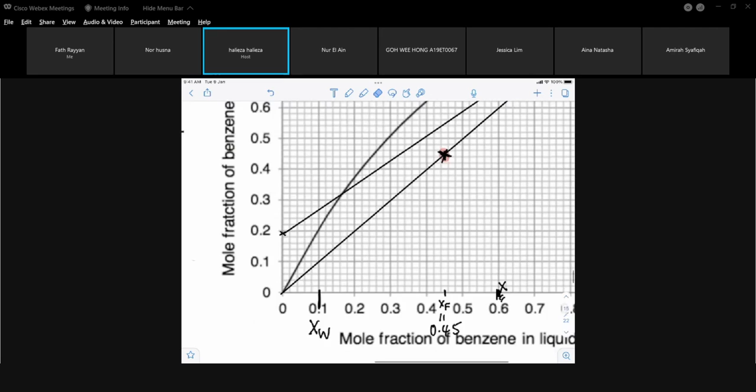So let's do it using slope instead. So that means this value is correct - sorry, that value is correct, isn't it? It's too big though.

1.37 is beyond our graph because our highest value is 1.0. That's almost 1 o'clock, so I better hurry up. So let's find x as something else, not 0.6 - let it be closer to 0.45, 0.5.

This equals 0.5, and what is your y then? Anybody, can you come up with an answer?

0.756, so that's roughly 0.76. Okay, your coordinate will be x equals 0.5, y equals 0.76. So that's one point. The other point is on the x, on the 45-degree line. So 0.5, 0.76.

0.5, 0.76, that's 0.5 there. Yeah, I better erase this. 0.76, isn't it? Yeah. So that's 0.76.

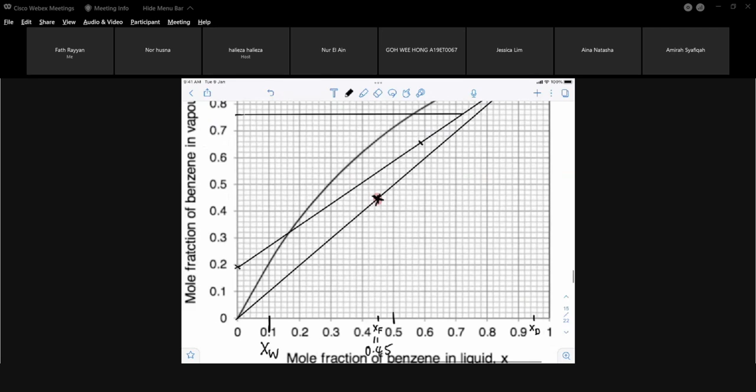So where do the two of them intersect? At 0.5. There you go, there you go. So that's our point, that's our point.

Okay, so now you have that point here, on the 45-degree line for the feed. So now you have enough points that you need to draw your Q line yourself. Let me erase this, don't need that. I have enough points to draw myself a straight line.

So from the 45-degree line, draw a straight line - there you go, that's my Q line. Okay, thank you very much, thank you for pointing out my mistake.

That's your Q line. Where does it intersect with your x-axis? Sorry, where does it intersect with your enriching operating line? That is the point of intersection, not the earlier one - the earlier one is wrong. Here.

Need to get smaller. Okay, now you have your Q line and your enriching line. This is your enriching line, operating line.

Yeah, so we'll stop here because we won't be able to cover it in just five minutes - in fact it's less than five minutes, so we stop here. Any questions?

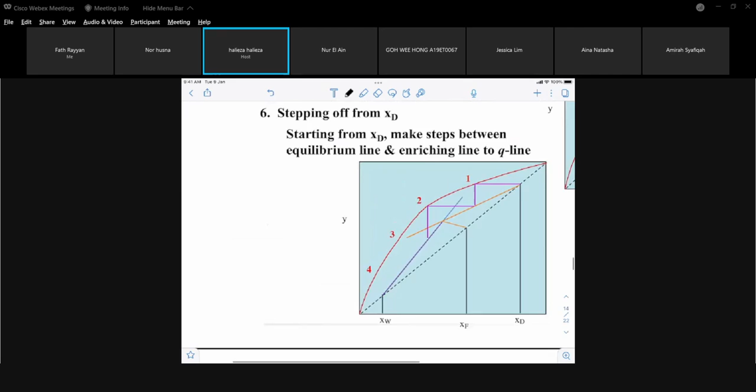For those who are keen to follow this example, in order to get the stripping line, all you have to do is connect your intersection of the Q line with the enriching line. Right, this is the intersection - this line and that line, that's the intersection.

So to get your stripping line, you get it on the 45 degrees line, XW, connect these two lines. That will be your line.

Any questions? After that, it will just be stepping off your number of stages. But then you need to read this statement before you can proceed to do the number of stages. Any questions? Anybody?

I hope it's very clear because this question is going to come out in your second test. Graphically, it's not difficult, but it's just time consuming - that's the problem. Graphically, to draw the graph, to do the solution, is not difficult, it's just that it's time consuming.